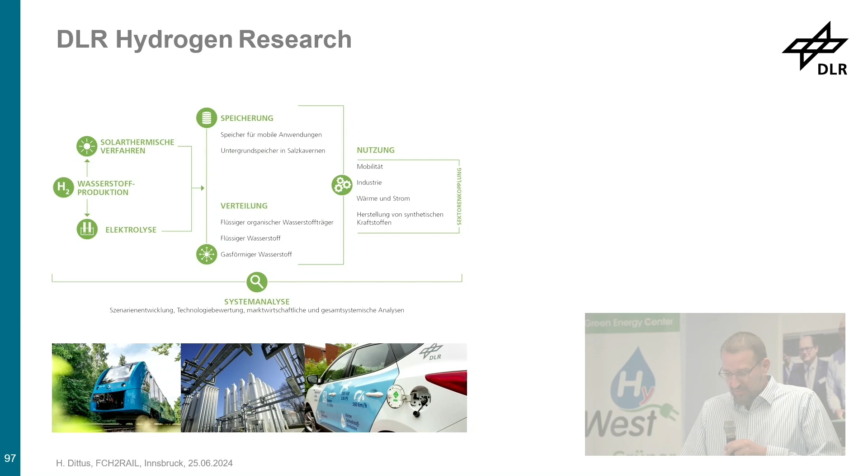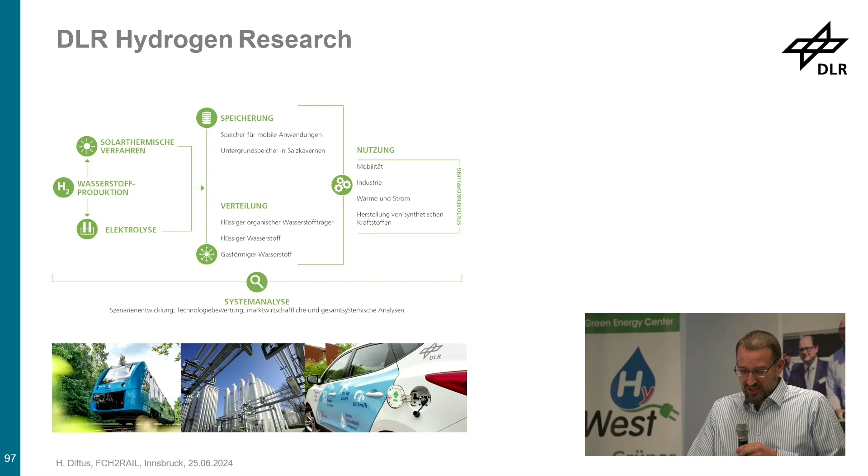As a whole, DLR does a lot of hydrogen research already. We used it as propulsion fuel for rockets, but we're also talking about generation of hydrogen, as shown this morning, about storing hydrogen, and about using hydrogen in the mobility sector, which is where I work.

I come from the Institute of Vehicle Concepts, one of 30 institutes, and this is one of the pure transport sector institutes. We work on everything from bicycles to trains—everything with wheels is on us—and one of the topics is especially alternative drives across all these technologies and vehicles.

Coming back to railways, why do we talk about hydrogen in railways? In Germany we have at the moment about 2,900 diesel multiple units, so the CO2 emissions from these are quite high.

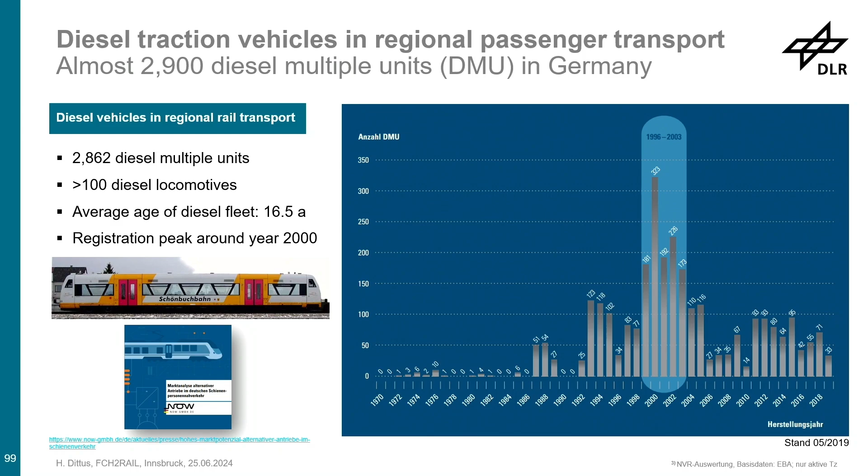This is the point where electrification is often not the most economic thing, so we need to think about different solutions. Another topic is shunting locomotives—2,800 locomotives in Germany.

Average age is 42 years, so you can imagine these are not the newest diesel engines, and maybe not the cleanest ones. It's not as visible as passenger transport, but anyway, we need to do something.

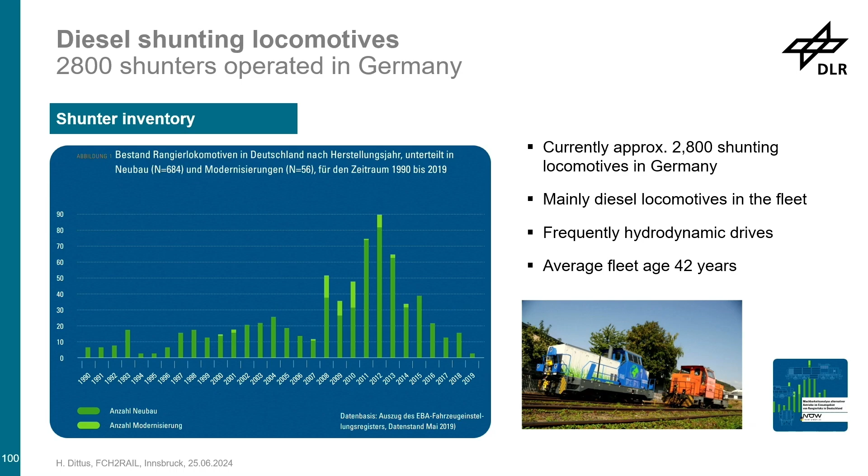We had the chance to send a proposal for a European call from the Fuel Cell and Hydrogen Joint Undertaking, now the Clean Hydrogen Partnership. It started in 2020 to prepare the call, and the project we won started on 1st January 2021, for 4 years.

We are a consortium of 8 companies and partners. We have Toyota as a fuel cell manufacturer in the consortium, and we have CAF as the train manufacturer, one of the biggest partners.

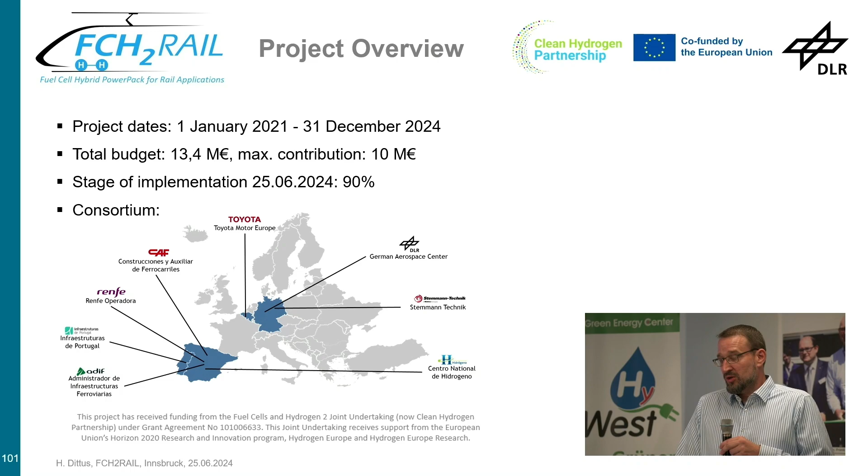We can be glad that we have Renfe as an operator who provided a train we can use as a demonstrator. We have the two infrastructure managers from Portugal and Spain, which helps us with all the authorization topics and driving on the public network.

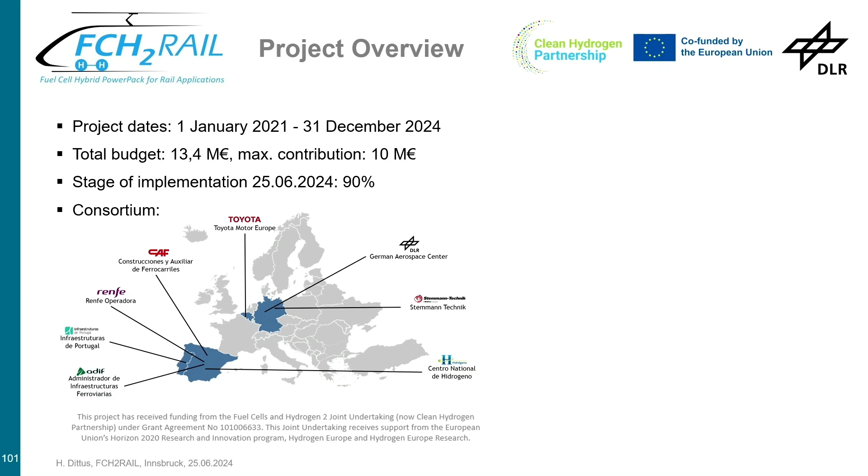We have the National Hydrogen Center and DLR as research organizations, and Stemmann, part of the Wabtec company, which works on pantograph topics, while Faiveley works on climate topics.

Some of our objectives include finding additional solutions to use waste heat in fuel cell drives, and to use other hydrogen-driven HVAC components in the train.

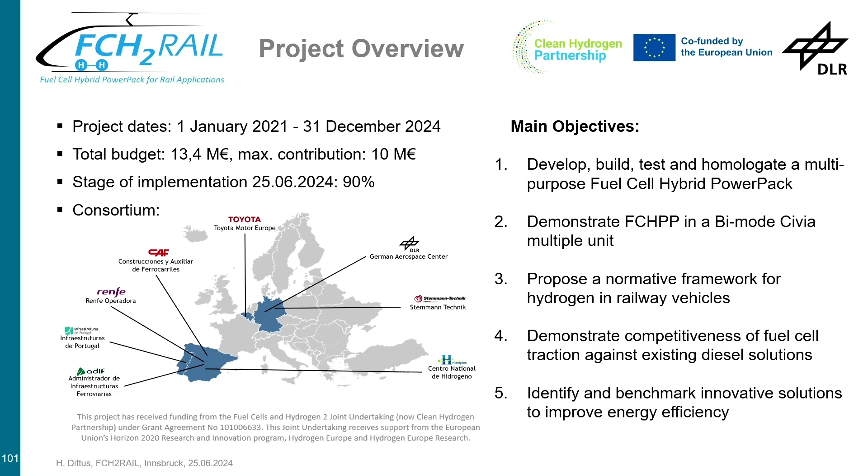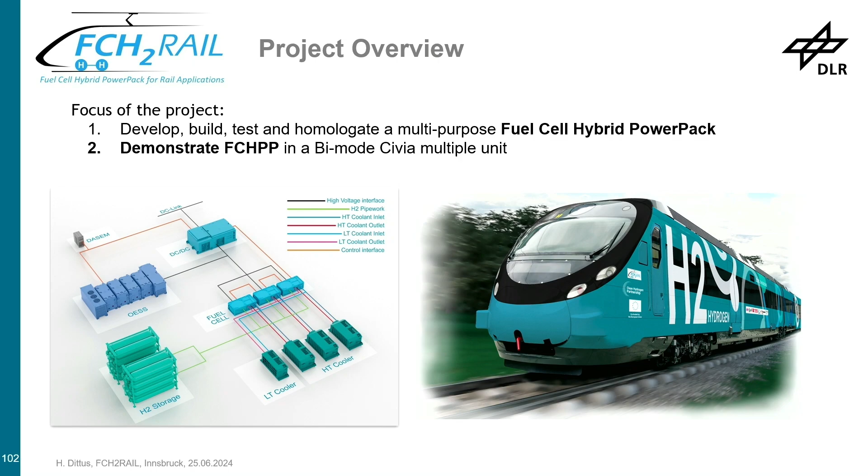We started to evaluate all the requirements for different countries—in this case Spain, Portugal, Germany and Slovakia. We analyzed the diesel lines currently in use and their typical services, then chose the most important services, those on special slopes, at very high altitudes, or requiring high speeds or high ranges. From this analysis of boundary conditions and requirements, we derived the specifications for this fuel cell hybrid power pack.

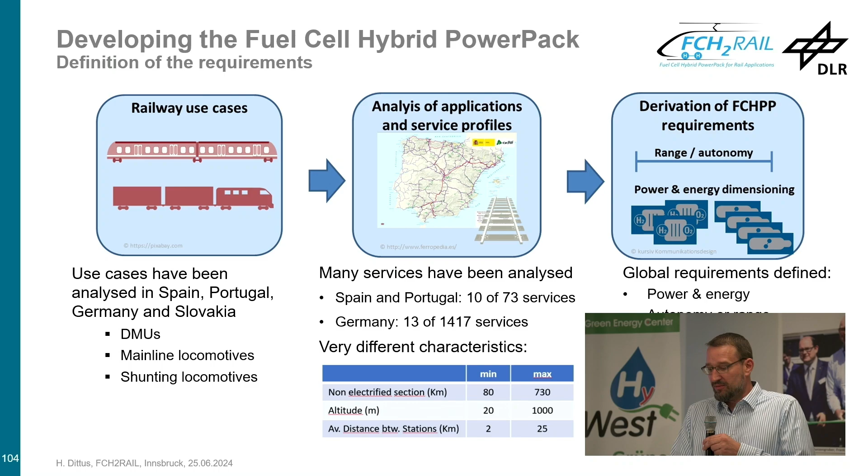DLR was engaged here in doing all the service profile according to EN 50591. And we also started in the beginning with thinking about the H2 refueling.

There are different options for the train: we could go for 350 bar, 700 bar, or liquid hydrogen. In that case, here we decided to go for 350 bar.

But it's also a question of how to supply hydrogen to the train and what is needed as a hydrogen refueling station. As mentioned before, in Switzerland there is no adequate infrastructure for hydrogen refueling. We had more or less the same problem in Spain. It's not easy to rent something, so it wasn't the goal of the project to develop a refueling station, but we had to in the end because there was nothing available that we could use.

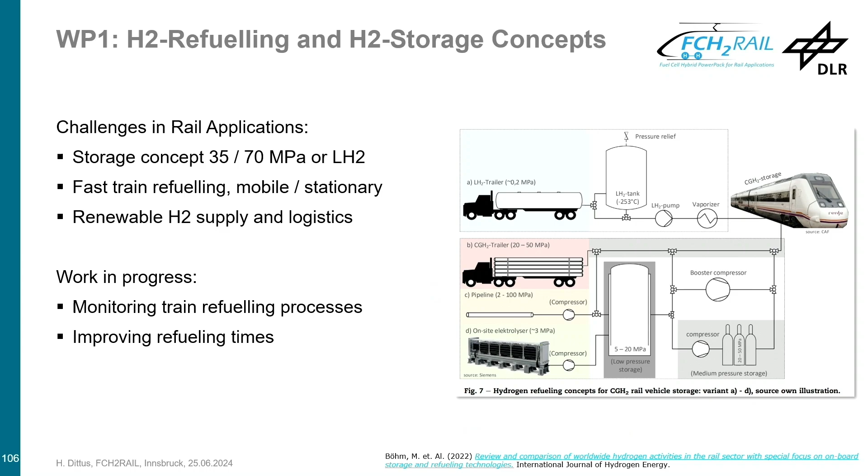The fuel cell power pack itself, the idea is to have it scalable and modular so that we can use it not only in this specific demonstrator train, but also in locomotives, in shunting locomotives, and as a refurbishment product for other trains that come to the end of life or already have electric drive replaced by diesel and shall be reconverted.

The components come, as I said, from Toyota, the fuel cells. The energy storage system comes from CAF. The DC-DC converters also from CAF. The energy management system, which combines the driver assistance system with the controls of the hybrid system, is also made by CAF. And the cooling systems and the storages for hydrogen are third-party products.

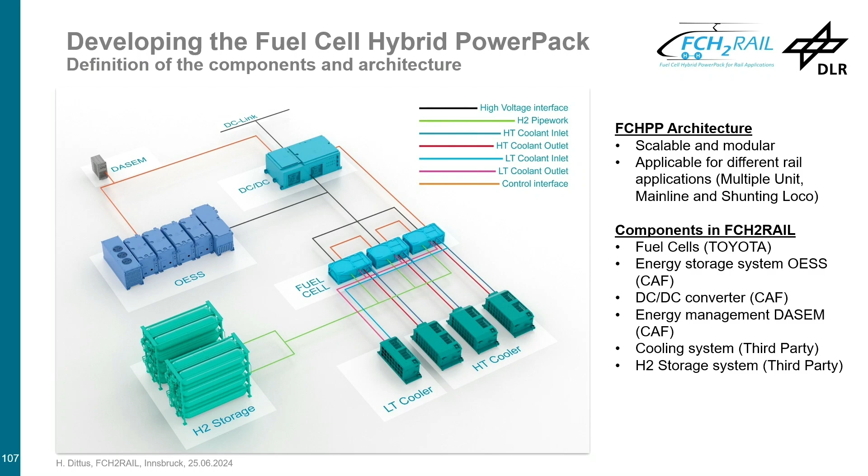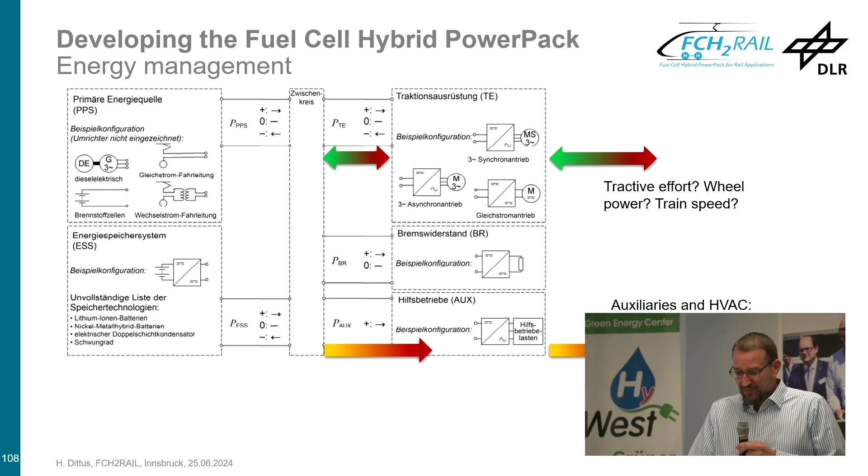As mentioned, energy management in such a hybrid system is quite a complex topic. This is taken from an EN norm, EN 62864-1. On the right-hand side, you have all the consumers: tractive effort, clearly traction equipment, is consuming a lot of power, but also the auxiliaries and the HVACs are consuming power.

You can get some of the energy back during braking. So if you have a pure battery train, it would be a configuration like this one, where the battery is doing everything. In case of a fuel cell hybrid, you have in addition the fuel cells that can do something, and now you need to choose who is doing what at which time during the operation.

But not only during operation, also when you build the system, when you design the system, you have to think about which amount of power is coming from the batteries and which is the amount of power that comes from the fuel cells in the end.

In our case, we would also have, as we are a bi-mode train, the catenary and a pantograph there. So it's not our intention to use all three of them at the same time, but the batteries are charged during operation under catenary, and we can drive and use the overhead line with that kind of train

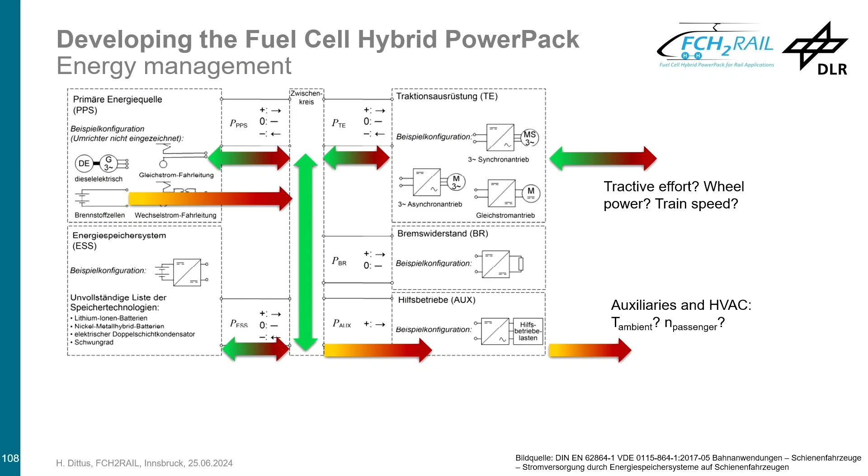whenever it is available. The challenges are, as I said, the design and dimensioning of fuel cells and batteries on the one hand, and on the other hand, how to work with them once they are built in the train, how to operate them properly to reduce the energy consumption.

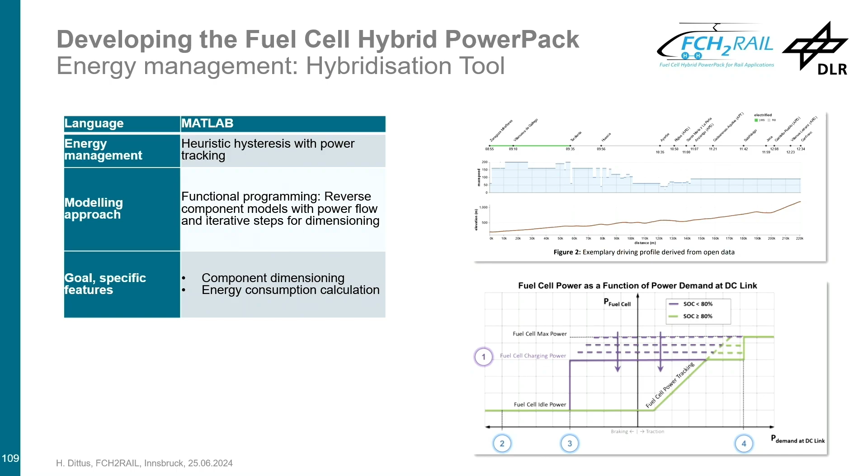From DLR side, we developed two tools and validated and applied them in the project. We have a so-called hybridization tool, which uses a simple control strategy to get the dimensioning of batteries and fuel cells.

And on the other hand, once the train is built, we use a tool called Smart Energy and Speed Optimizer for rail, which is able to optimize the speed profile together with the controls of the fuel cells and the batteries in a way that you always have enough power and enough energy available, also by influencing the drive power you need, the traction power you need, by influencing the speed profile.

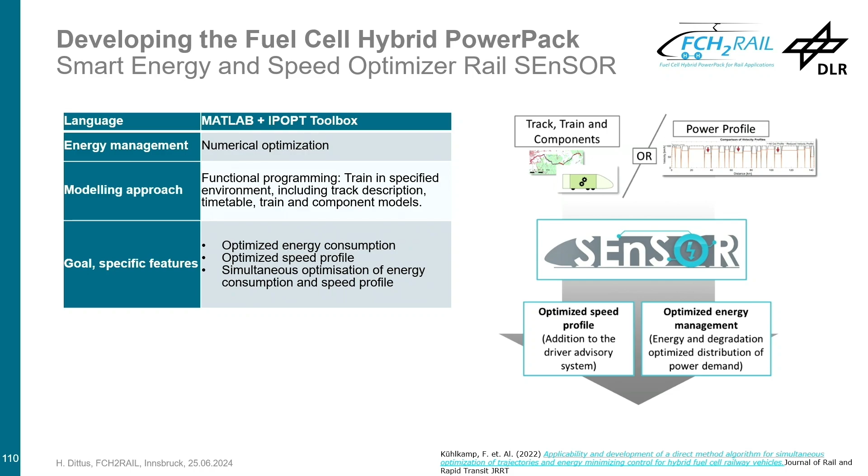So this is now more or less what we really did in the project, or the other partners. This is a picture of the fuel cell system. It's a second generation fuel cell system from Toyota, the same that is also used in the actual Toyota Mirai, but of course in a little bit of a different layout.

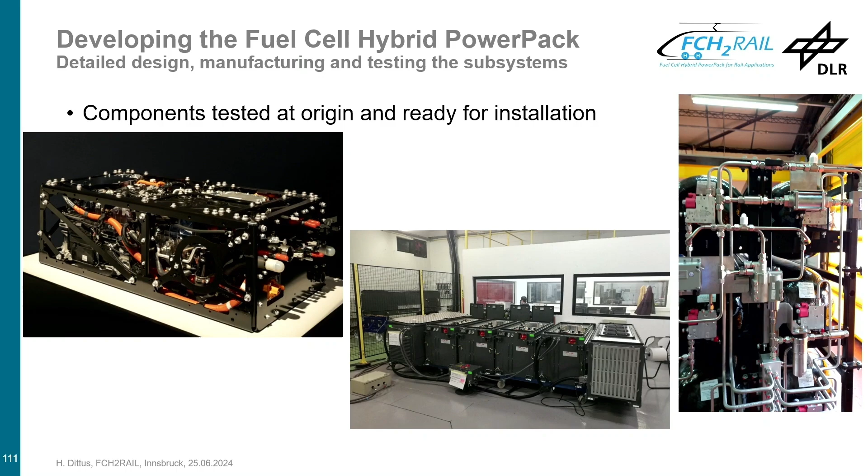These are one of the two energy storage systems provided by CAF. And this is one of the four racks of hydrogen storages that are brought to the vehicle, with very complex piping, as you can already see here.

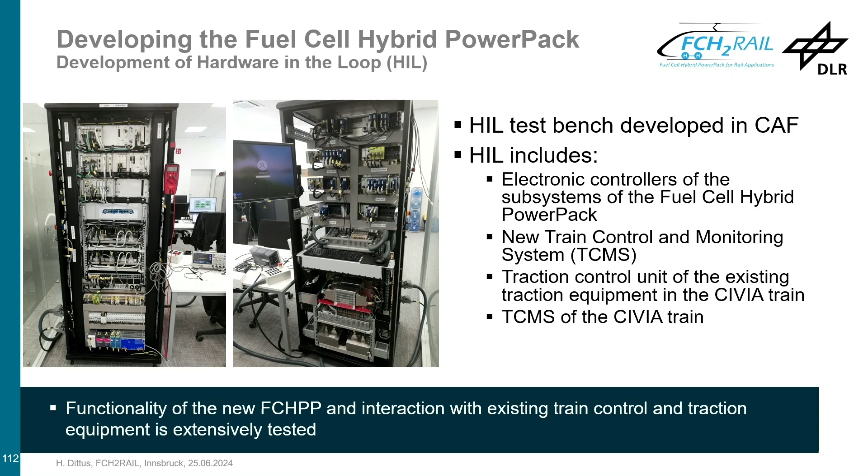Everything had to be tested with the controls before, so CAF built a hardware-in-the-loop test bench, especially to show or to test the integration with the train control and monitoring system before it was really operated in hardware.

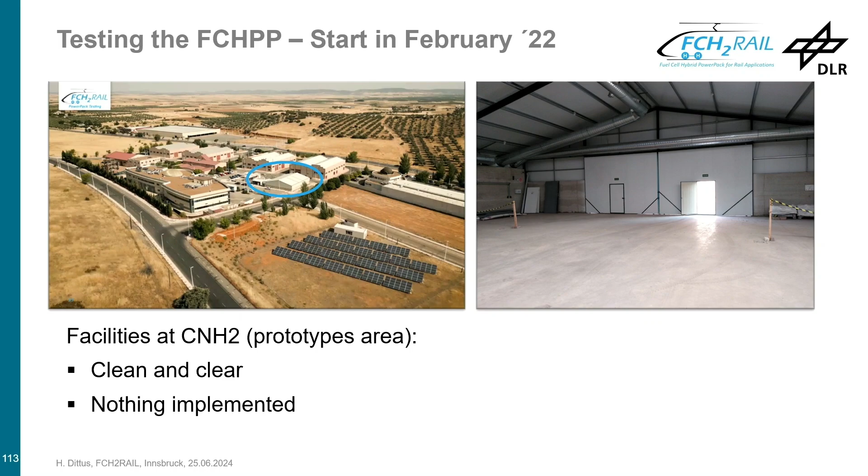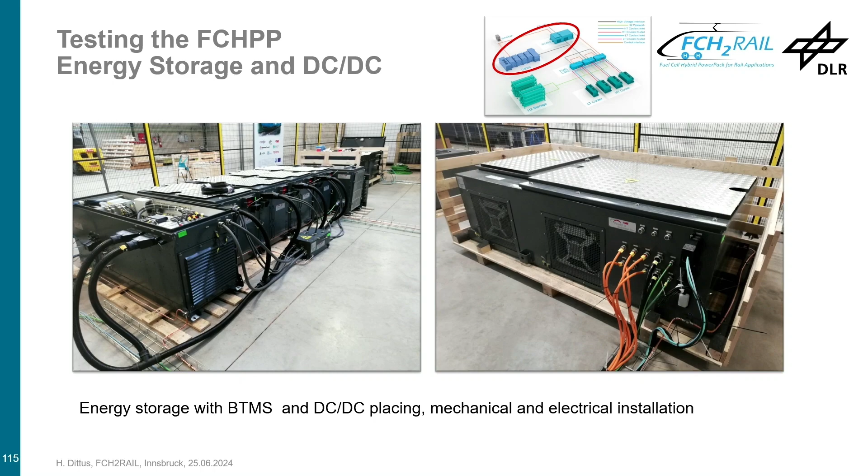One of the two power packs used for the train was built outside the train here in CNH2's facilities in Spain. So we started in February 2022, 14 months after project begin, with building up the first power pack: 3 fuel cells with their cooling systems, the hydrogen monitoring and supply panel, one of the storage systems, and a big DC-DC converter to put everything to the 3 kV DC voltage of the train in the end.

This test program was, on the one hand, testing the components, but also consumption tests according to standardized profiles by the European Joint Research Center, drive cycle tests, ramp-up tests, and specifically created tests from our use cases and service profiles. As a result of these tests, we consumed more than 220 kilograms of hydrogen during testing, and we got detailed knowledge and could optimize the whole energy management system and prove that the system is working as expected.

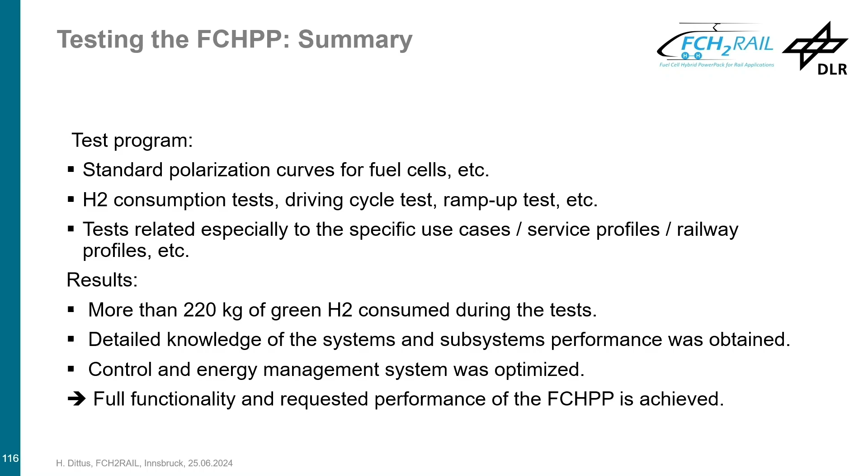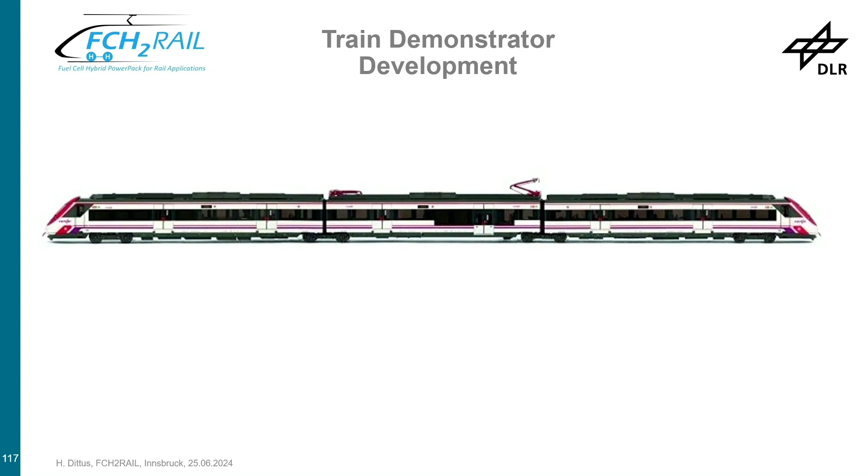The other topic was to develop the train demonstrator itself. This is the CIVIA 3-car that we got from Renfe as a basic electric train. The aim was to make it into a hydrogen train, while still having the pantograph equipment there. So we started with the development in 2021.

We started with the testing in 2022. In parallel, the second power pack was integrated into the train, and first static tests were done in the beginning of 2023. Static test means the train was standing or driving on a closed area. In May 2023, we received the first authorization to travel on the Spanish network with the full train with both power packs.

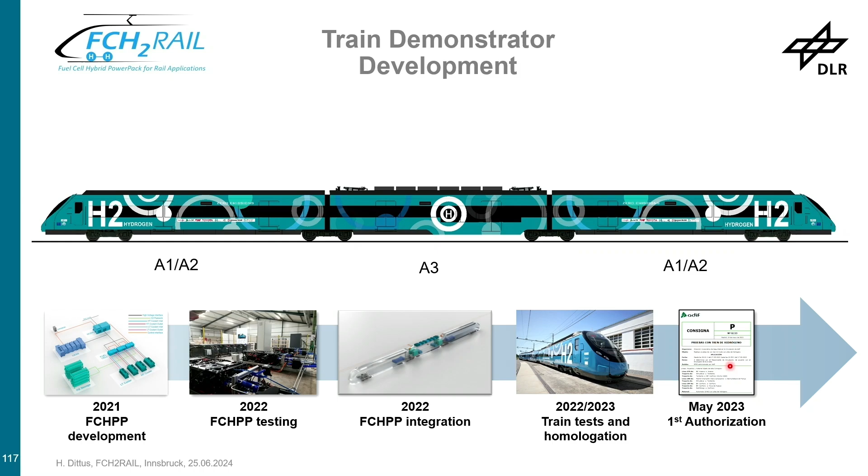At the moment, for the demonstration of the train, we could only use the dispenser with an overflow filling. Now, as the train demonstration is already done completely, the aim of the project is to validate the full refueling station, which we will do this year until the end of the year.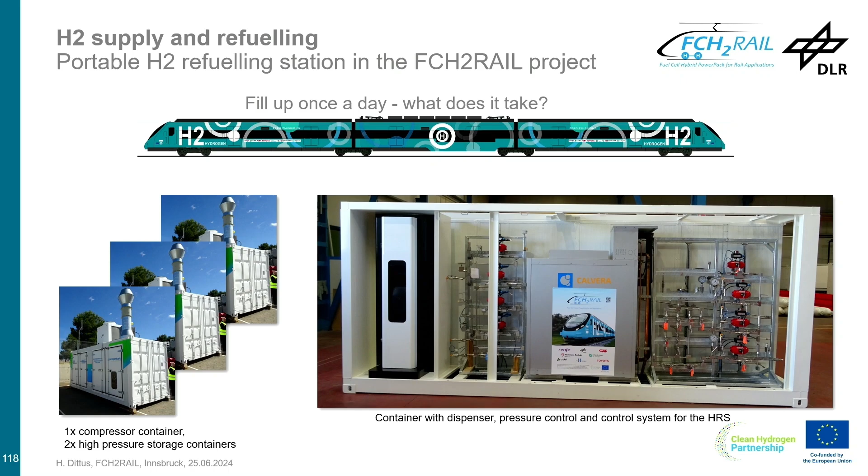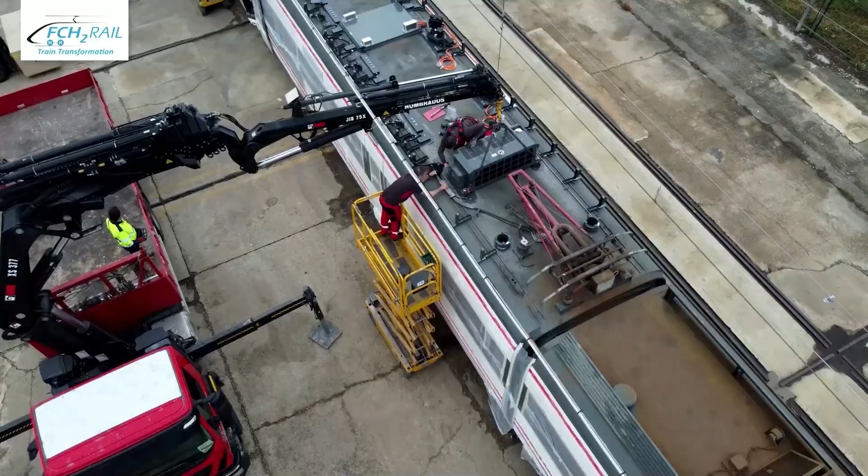So I have also some pictures, hopefully no sound. This is part of the testing in Puertollano with the fuel cells there, the battery systems that have been on the train. In parallel, the HVAC systems have been dismounted from the roof, and fuel cells and their cooling systems have been mounted on the roof of the train.

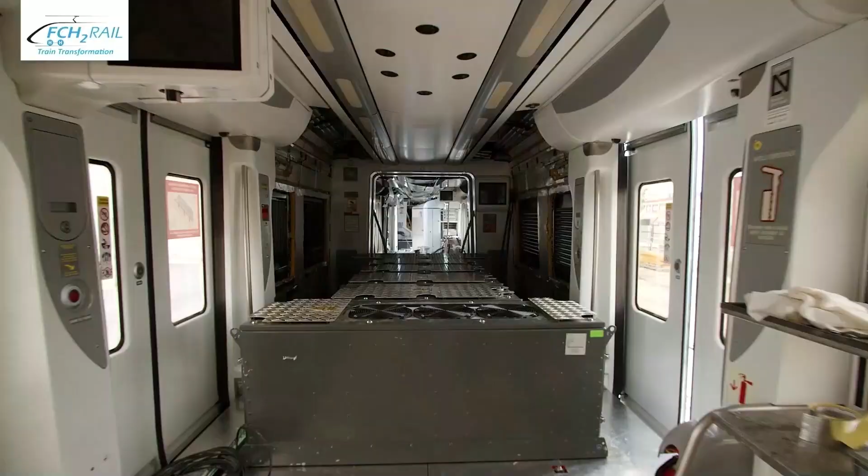The energy storage systems have been brought to the middle car, so all the seats have been taken out, and batteries and tanks, hydrogen tanks, have been brought to the middle car.

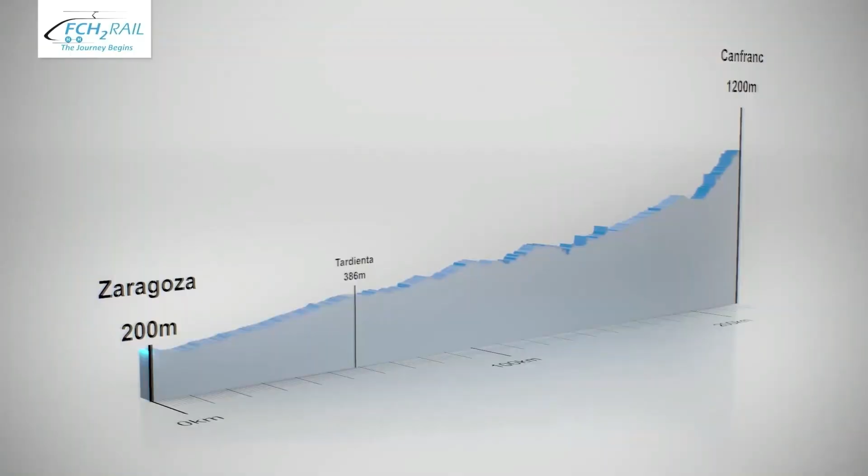Then we started our first tests on the line from Zaragoza to Canfranc in the Pyrenees. It went steep up to 1,200 meters. As you can see, no catenary, no choke - it's purely hydrogen driving there, even on these demanding lines.

In the meantime, our whole testing program has been achieved. We have not only been testing on this line - we had 4 other lines in Spain and 1 in Portugal, making this train not only the first hydrogen train on the public network in Spain, but also in Portugal. We could also do an autonomy test, which was in our case 800 kilometers on hydrogen purely, plus unlimited with the catenary, of course.

I was asked to put together some of the facts. So the train demonstrator itself is a 3-car unit with the 3 kV pantograph DC system. The energy storage systems range up to a max power of more than 1 megawatt - not on the wheels, but of course on the energy storage. Quite small compared to the power they can deliver. We have 6 of those 2nd generation fuel cell modules from Toyota, which are rated 80 kilowatts each.

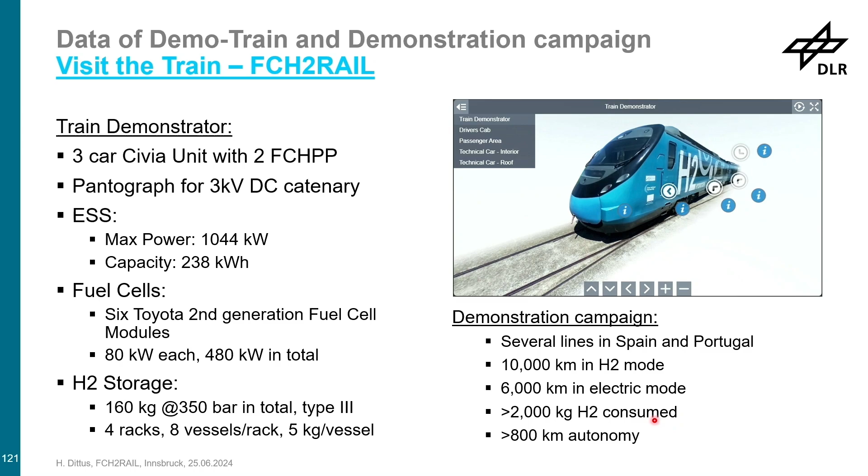And 160 kilograms of H2 storage on the vehicle. In our case, it's Type 3 storage, which is not so critical for refueling like the Type 4 with the temperatures. That's good because we have higher temperatures in Spain and had higher temperatures during testing sometimes. We have now been driving more than 10,000 kilometers in hydrogen mode, about 6,000 in electric mode, consumed roughly 2 tons of hydrogen, and could prove this autonomy of a little bit more than 800 kilometers.

That's it so far as a short overview. If you are interested, you can have a look at all these videos on YouTube where a lot of the different phases are described. And that's it so far from my side.